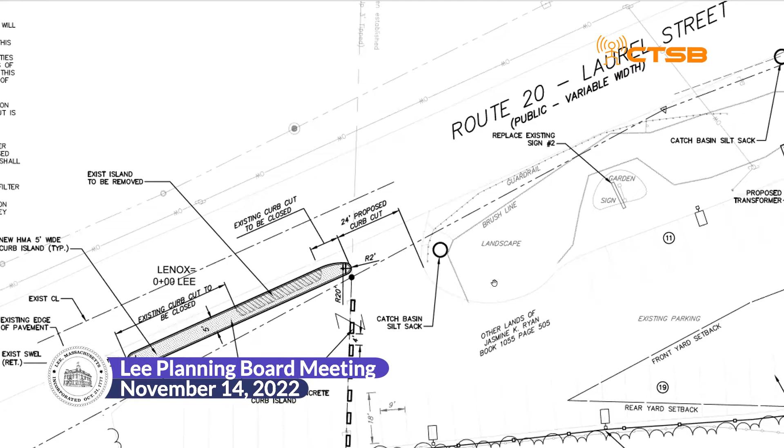Thanks, Pete, and feel free to jump in at any point if there's anything you want to hit on as well. For introduction, my name's Dan Delany. I'm a vice president with Fuss & O'Neill and a licensed professional engineer in the Commonwealth. I currently manage our Springfield regional office.

For this project, we're here before you to talk about one change to the site plan, which involves the change to the driveway orientation from what you saw during the original approval process. This is a result of our filing with MassDOT for an access permit to allow access from the site onto Route 20. That work was undertaken last spring, and we submitted the permit to District 1. They reviewed it, there was a couple of comments along with some questions on our traffic study, and we responded with a revised plan, and they issued their final approval based on the plan you see before you.

Let me pull up the date. I apologize, I was scrambling to get all this on my screen in case Pete couldn't get his up there, so I've got about 100 things open. Dan, I think this is the permit here. Yes, that's the permit there.

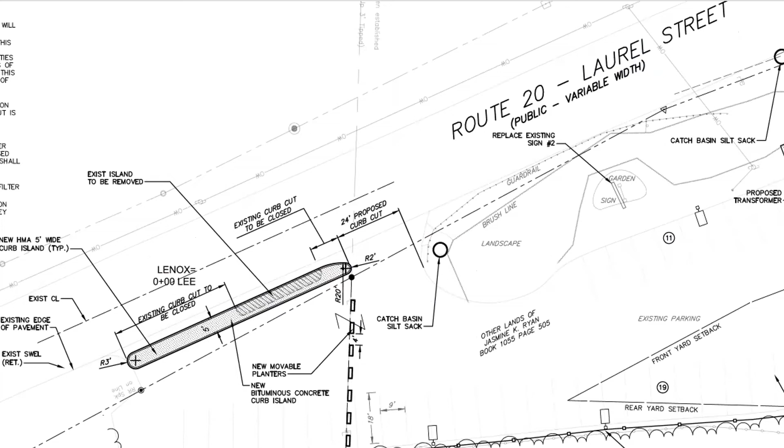So there you can see that was the final approved permit, which we worked out with DOT. If you go back to the site plan, Pete, the existing condition of the site along Route 20 currently has two kind of wide open openings, or curb cuts, if you will. They're barely curb cuts because they're so wide—the one on the left, or north, I believe is 39 feet, and the one on the right is 36 feet of open space. This is an existing condition that predated any previous MassDOT permitting.

It's not something they would allow in any way, shape, or form in a new permit. So when we went to them for an access permit for the site to access Route 20, we proposed a couple of variations of closing this off, resulting in one entrance, because we know from our experience, many years working with MassDOT, this is a major safety concern for them to have these wide open entrances onto a state route, especially ones in close proximity. Right now, the island itself is only approximately 30 feet wide, just round numbers—so you have a 39-foot opening, about a 30-foot island, and then another 36-foot opening.

This introduces, from one parking lot, multiple potential conflict points that really only serve to lessen safety. You have very dangerous movements here when you have the potential for somebody to make a right turn out of the north driveway and a left turn out of the south driveway, completely unchecked, in an area that's 1.5 to 2 times as wide as a normal driveway.

So this is something that Mass DOT routinely has us clean up anytime we go in for an access permit for any type of development.

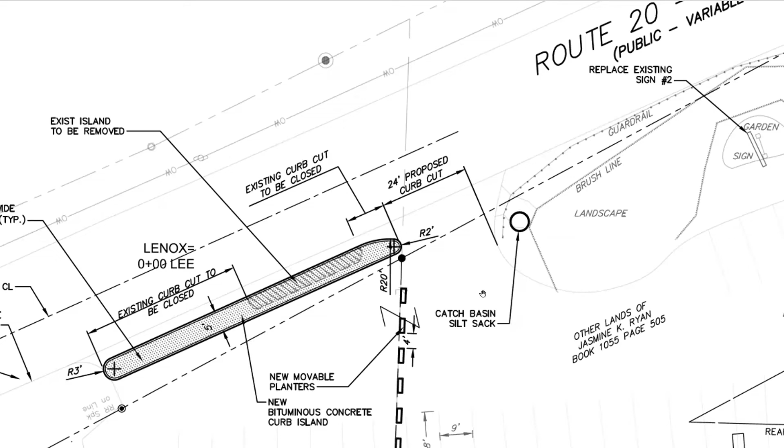I believe I mentioned in the select board meeting that what's also removed here are some of the most dangerous and potentially conflicting parking spots. In order to back out of any of those lower parking spots, you're essentially backing into a 39-foot wide entrance off a road with an average median speed of about 45 miles an hour. So those spaces were kind of the least safe on the site anyway, and removing that conflict definitely results in a much safer condition.

I don't know, Pete, if there's anything else you want me to go over, I'm happy to do that. But what we're looking at here is what's been changed since the last time we were before the board.

Dan, just one thing before we turn it back to the board. You had said the existing spots to the north, I think it's these spots are to the south actually, the remaining spots, right? Correct. Yeah, the remaining spots are to the south. Yes. What was removed was the 6 to the north. Sorry, yeah, okay, I just wanted to make sure that was clarified.

So, Mr. Chairman, that's the overview, and I'm happy to take any questions from the board.

Okay, I'll start with the first one. You had an accepted site plan, you were ready to go, you had a special permit done by us. Why this now? Not just because you wanted to make traffic flow in and out better, come on, to cut Lenox out of it?

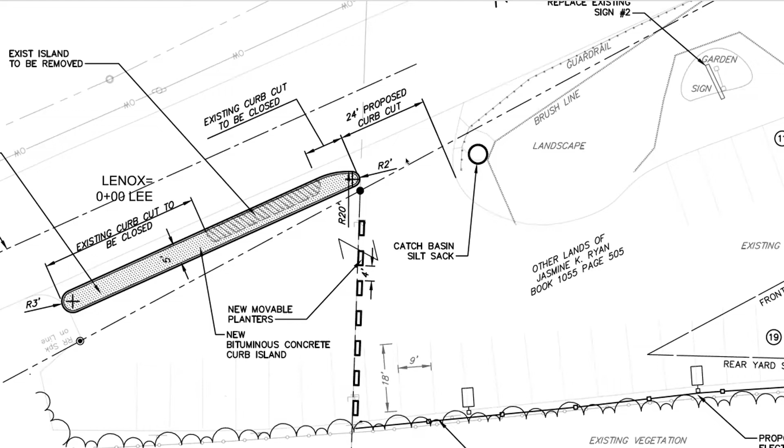One technical question. Your letter of October 13th from Stephen Savaria references a plan, but it looks like the date is October 14th. Is October 14th the date of the plan you're showing us on the screen? I believe it is. Can you check, Pete, to make sure? Let me zoom out here one second. I think there's a rev date up, should be right there - 10/14. Yes, can you see that date there?

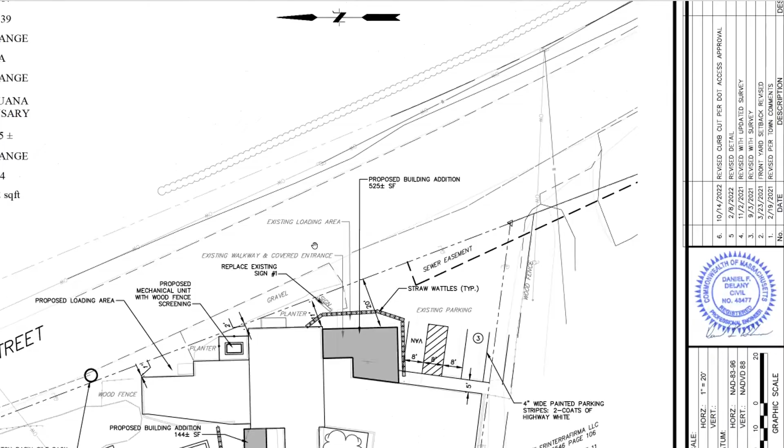All right, good. My second question is substantive. I'm a little surprised, and I realize what I'm about to ask is totally at variance with what you report as the consensus among the engineering community, but it's not obvious to me that a 24-foot curb cut on a 45-mile-an-hour highway is a safe way to get in and out of a lot. It seems like somebody coming southbound toward Lee from Lenox at 45 miles an hour wanting to make a right turn could run headlong into somebody exiting that lot, even if everybody's trying to keep in their lane, if the guy coming southbound swings a little wide. Is that an unreasonable concern on my part?

Just so I understand, the concern is that somebody's coming southbound on Route 20 wanting to enter the site, while somebody else is going out at the same time, and that's 24 feet? I guess 12 foot is a normal driveway - is that right, Dan? That's correct. Yeah, 24 feet is a normal roadway width, and either 11 feet or 12 feet is a normal lane width, depending on the type of road.

So even though the highway speed is 45, you don't think anything a little bit wider than this would be safer? I don't believe there's any safety improvement by making it wider.

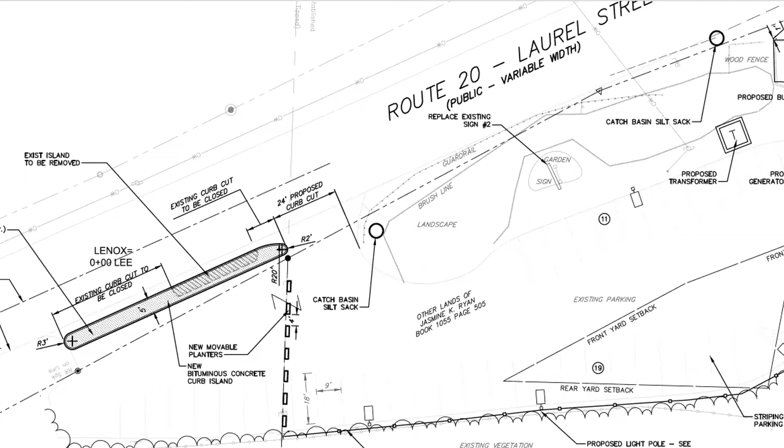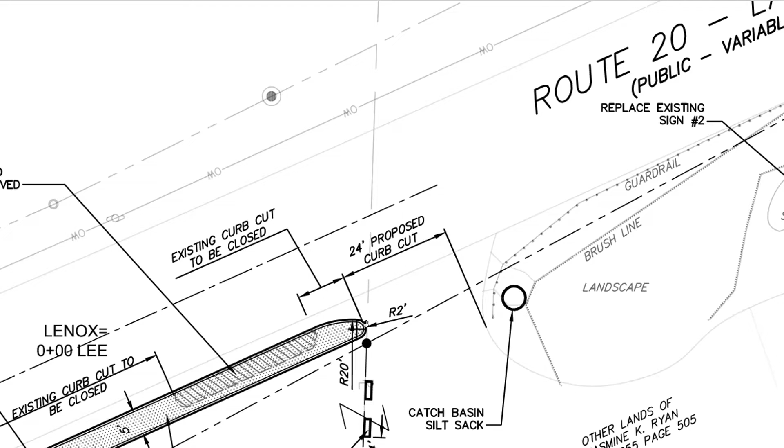But one other thing you mentioned previously that may be important for the board to consider - the 24 feet is here, but for people turning right, this is the actual curb line, isn't it, Dan? That's correct. The 24 is wider here for people to pull to the right and join traffic. It's hard to see, but that's the curb line as it will be when done. The 24 feet is measured at the narrowest point - that's the most constrained point. But it flares, this curb flares just like any other entrance, and looking at it in that one direction it flares about an extra 8 or 9 feet right there. All right, thank you.

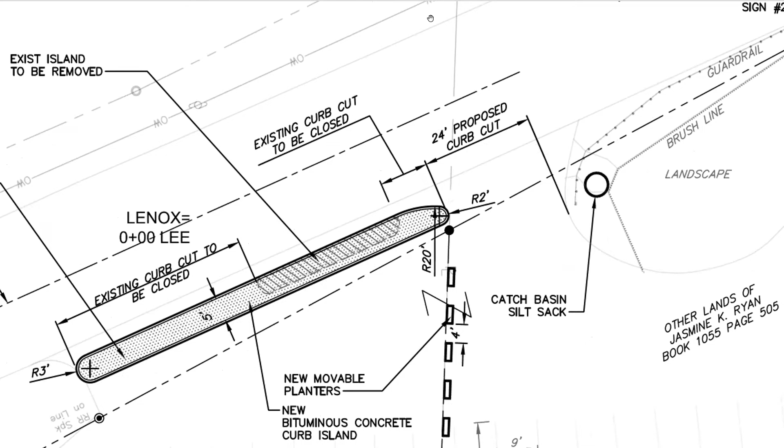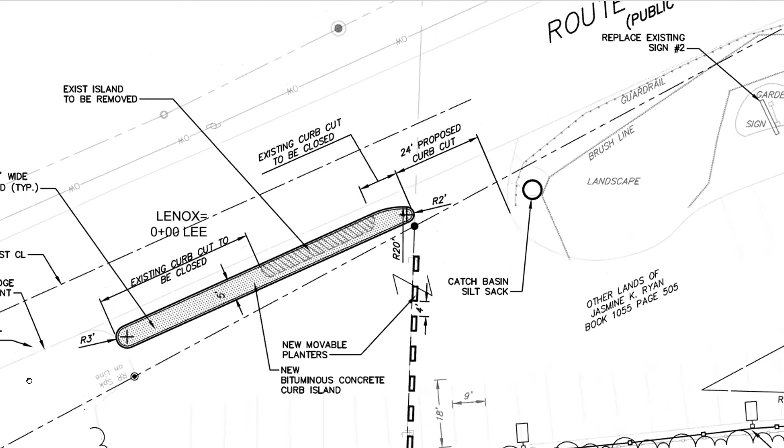Dave? Yeah, a couple of questions. Would DOT allow a sign to slow the traffic down, saying exit speed reduced, someplace north of the driveway? Because where it joins the angle of the main road, it's okay if you're heading towards downtown Lee, but when coming from Lenox down, it looks like a pretty sharp turn to get into the parking lot.

And where the bull nose is, this is just something I want to throw out. What if you put like a Cape Cod berm on that? So in a panic situation, somebody could drive over it by being airborne.

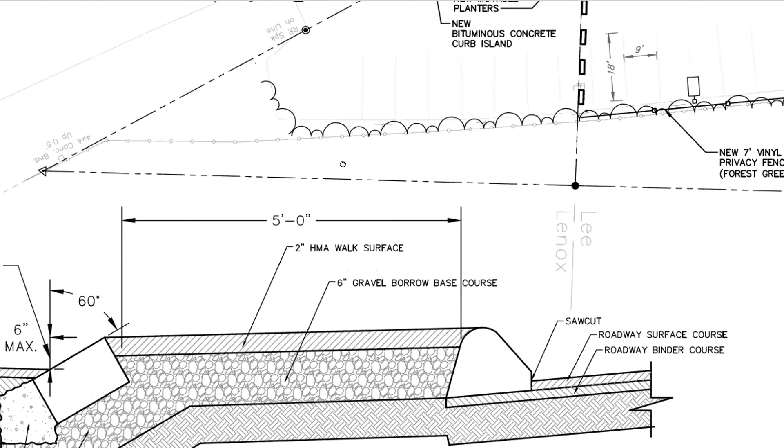Actually, it's a good point, and it's actually part of the standard detail. It's a slanted slope granite with only a 4-inch reveal at 60 degrees, so it's made to be mountable in the event that you accidentally clip it, or cut it too close. It won't help if you hit it going 45 miles an hour, but it's definitely a mountable situation where if you did cut it too close, you wouldn't throw your suspension out.

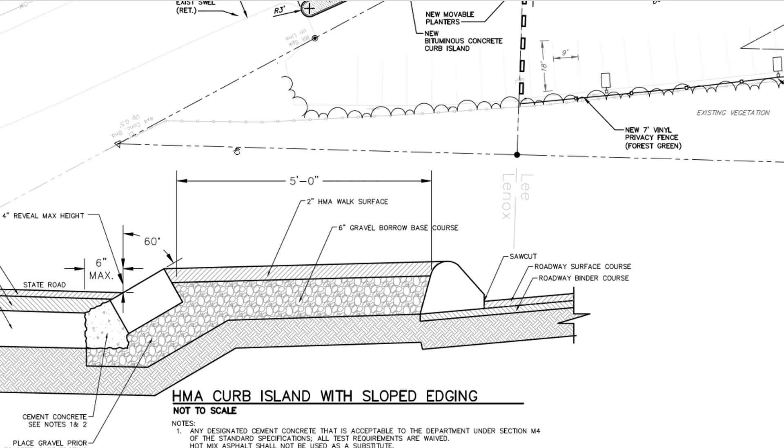Lastly, for me, are you going to clearly delineate the exits? Even with maybe a thermoplastic reflective, so at night it's visible where the turning lanes are, on the north and south side.

Yeah, that's a good point. This plan was laid out for DOT within their right of way, because that's their biggest concern. But yeah, that's something we could and will add.

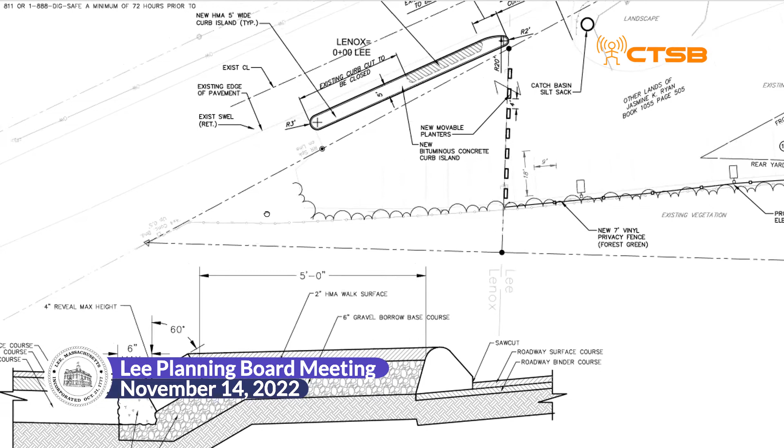And Dan, just for clarity, I'm not sure if you can see my screen. I pulled up that detail that's also included. Yeah, I was looking at it on my screen. I just want to make sure I was showing the board the right thing you were just talking about, the mountable curb.

Okay, well it still looks like to me with that curve, if you hit it at any speed, you're gonna go airborne. The Cape Cod is a lot more of a transition, and maybe they can do that with granite. But I'd be really concerned about keeping that, especially on the ends where the two lanes come together, the north side and south side exit, north side entrance.

I mean, yes, you can see it, it'll be an island. But if you have somebody coming southbound who at the last minute sees they missed the exit or entrance for the driveway and they pull in there anyhow, you want to keep them on the ground.

I don't think we have much flexibility with the detail because it's a standard DOT detail for use within their right of way. It's their mountable slope granite edging for a situation like this, like what you would use on the side of a roundabout. That's a typical detail, so you're right, I wouldn't want to hit it at a 90-degree angle, head on. It's mostly made so if you cut the corner and roll up around it, it shouldn't damage your car, because it's a 4-inch, not a 6-inch reveal.

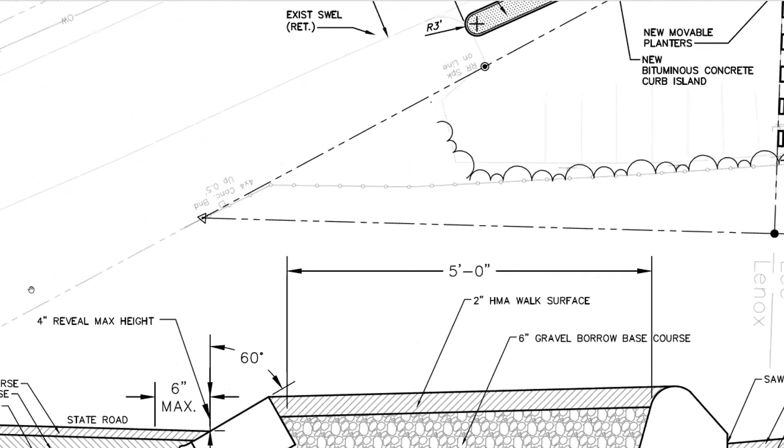As I say, you mentioned roundabouts, we've got plenty of them and they've been popping up left and right. So yeah, if it's like that, then I guess that kind of removes that part of my question.

All set, Dave? Yep, all set. Peg? Yeah.

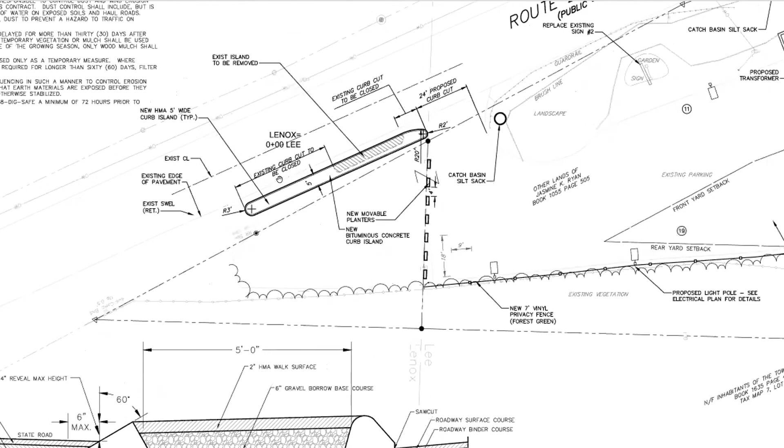I was concerned about the traffic, as you read the original notes, or the minutes of the meeting. DOT is saying that this is a safer way to do this, even though some of us still have some concerns. Is there anything in writing here? I'm sorry, I didn't read everything, but if there is, I'll read it. Just in writing that makes it their approved plan from their DOT.

Approved plan. Okay, could you just talk to me a little bit about the new movable planters and why they're there? Hey Peg, this is Pete D'Agostino.

So these planters are there to delineate the property line between the town of Lee and the town of Lenox. As we mentioned during the select board meeting last week, the reason we went with something movable is so that we could approach the town of Lenox about using this for snow storage or some other purpose. So we put movable planters, not removable but movable, so that we could potentially use this for additional snow storage or something to that effect. That's why we didn't put a permanent fixture in place, if you will. That was the thought behind that.

Thank you. If you ever do any more work on Route 20 or with the DOT, it might be wise to go to them first for the original plans.

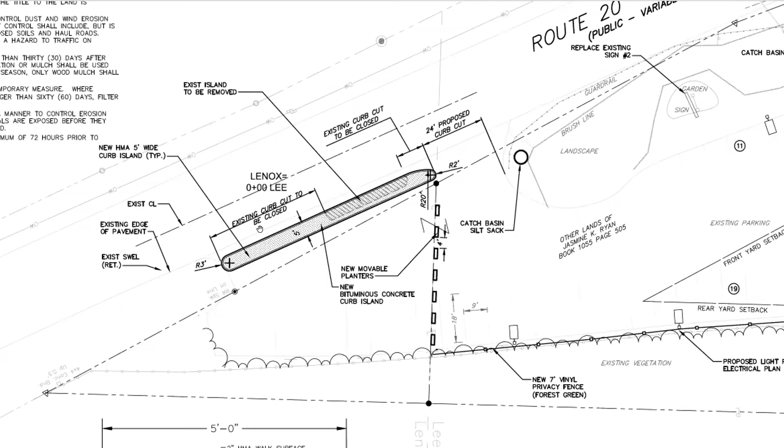Right, Matt has recused himself, but Conrad, you have a lot of comments. Bunch of them. Questions, a couple questions, a couple comments.

It does seem like the single point of access is far and away much better than the original two points of access, the much wider driveways that were 36 feet wide and 39 feet wide originally submitted by the applicant. So the single point of access is by far the better way to do it.

Agree that the MassDOT requirement for eliminating the northerly curb cut reduces the southerly curb cut down to a single point of access at a 24-foot throat. That is a MassDOT standard. Lots of times if you can get a 24-foot throat and widen out the radiuses of flares on either side, that's usually desirable too. We can talk about that in a second.

Since there's no parking on the north side of the Lenox piece, is there any way of removing the paving on that Lenox piece and installing loam and seed in its place? Just thinking that the edge of the paving and the grass would not need to be a curb, it could just be the edge of grass. It would certainly look a lot better visually as you approach the location. It also removes a bunch of impervious material and in its place puts pervious material that would absorb more stormwater flow on the north side of the property.

Although that would be minimal at best, it would still look far better if, instead of putting planters there with all this paving on that side that you can't use anyway, you just remove the paving and put in loam and seed. It would look a lot better when you come into the site. Just an observation.

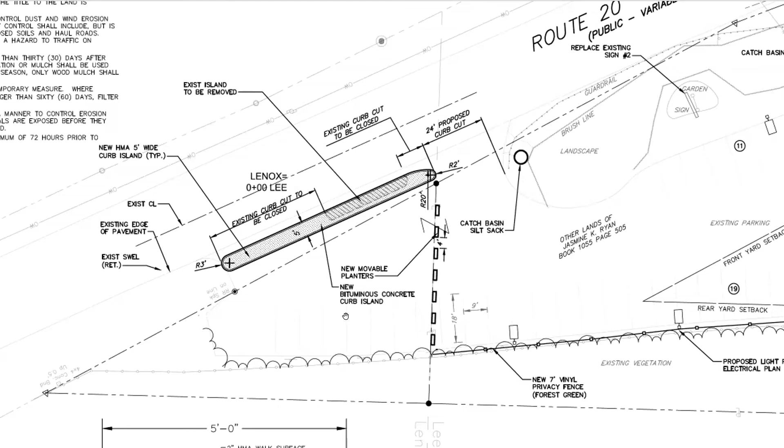It is a MassDOT standard, but if you can put a wider flare—I know you've got the wider flare on the south side—can you put a 20 or 30 foot radius on the north side where the bullnose is? If you put a 20 or 30 foot radius that wraps around from the front of the curb and runs tangential to where your town Lenox line is, that would give you more of a flare. You'll still have your 24-foot throat, but it'll give you a little bit wider flare to get in if you had like a tractor trailer or a large box van. Again, just an observation.

In the original approved plan, the parking that was proposed on the northerly curb cut was way too close to the right-of-way line anyway, and it was definitely a backup hazard at the point of entry.

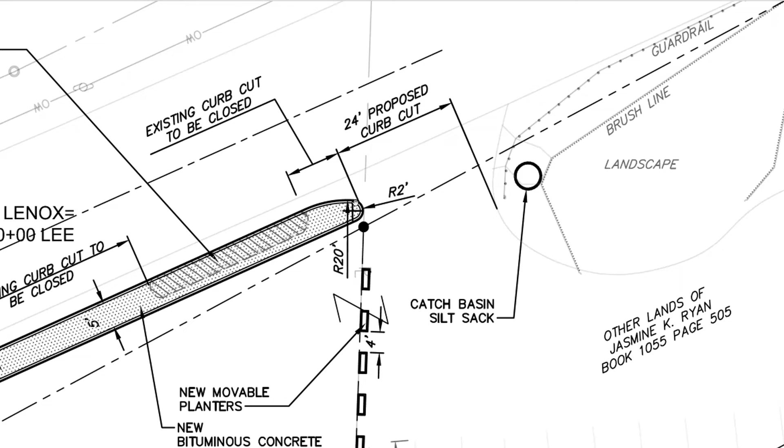I was kind of confused why the applicant didn't eliminate the two driveways and go with a single point of access initially, because that seems like it would have been the safer thing, and it really should have been done at the same time. I'm also curious why MassDOT wasn't consulted on the driveway configuration in advance

of the original planning board site plan approval and the select board special permit back in March of 2021. It seems like a lot of this could have been avoided if you went to District 1 and talked to them about the driveway configuration initially. They would have said right then and there that they're not going to allow the two driveways, and they'd tell you about the 24-foot driveway requirement. Going to District 1 initially just to get that concept discussed would help out considerably.

That's pretty much it. I think approval on the 24-foot is an absolute. If there's something you could do on that northerly bullnose, pick it out and put a 20 or 30-foot radius that runs tangential with the front curb as well as the Lenox town line, I think that would help, and still meet the criteria of the DOT 24-foot cut. Is that an option? Is that a thought?

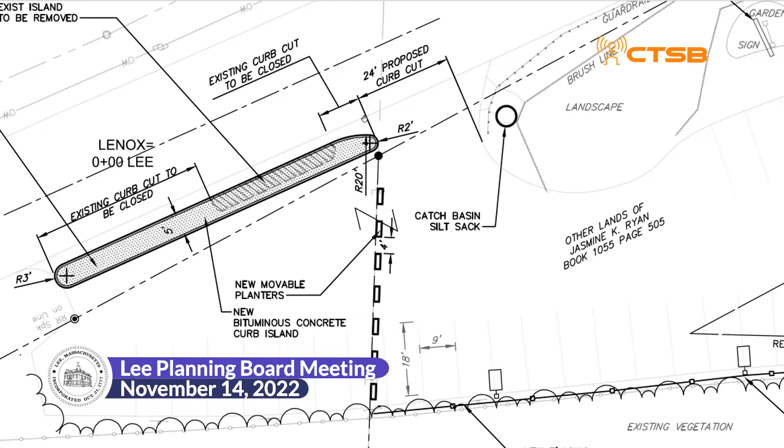To the member's question, Dan, if you could address the radius on the north side. But we do not anticipate any tractor trailers. The delivery vehicles for this use are primarily a Sprinter van or smaller.

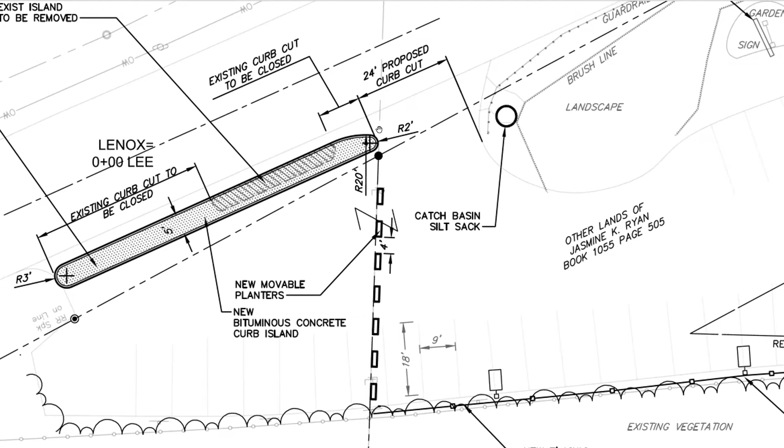Many of the businesses that will be delivering, quite frankly, are using those kinds of vehicles, much smaller in nature. I can't contemplate a tractor trailer truck entering this back. I guess in the world of anything's possible, but from general practice for the industry, deliveries aren't made with tractor trailers. Dan, if you want to speak to the radius on the north side of that bullnose, because that's not my lane.

Yeah, it's a good question, how do you treat that in the safest way possible. It's a good observation. I know we had put a 2-foot radius basically starting from, in this view, the bottom, curl that around, and then continued to 2, and that radius sort of matches into the full width of the island.

That's a wider radius. When we were talking to DOT, what they didn't want us to do is take the radius and dive it to a point, like a knife point. They wanted us to continue that 2-foot around just enough so it's continuously rounded, and then dive it. So that's why we ended up with that different shape there.

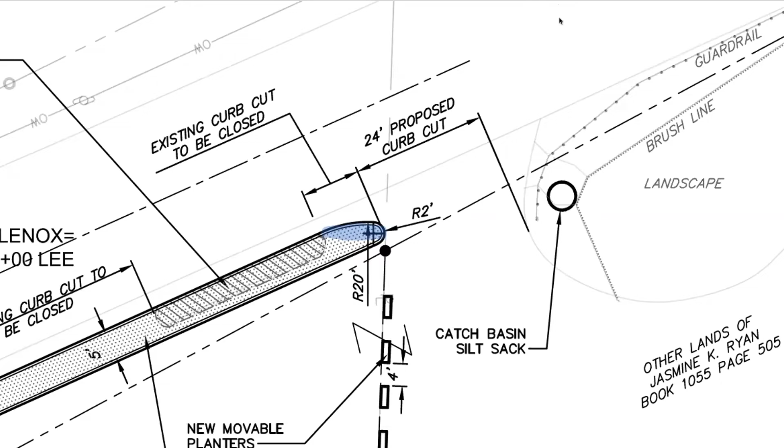That's why I was thinking, if you took that R20 your cursor is on right there, and again wrapped the front curb around to where the first planter is, that planter box you're showing, run a 20-foot radius around it. You'd still have the 24-foot throat, but you'd get the wider radius to get the cars in and out better. They have to stay out of Lenox.

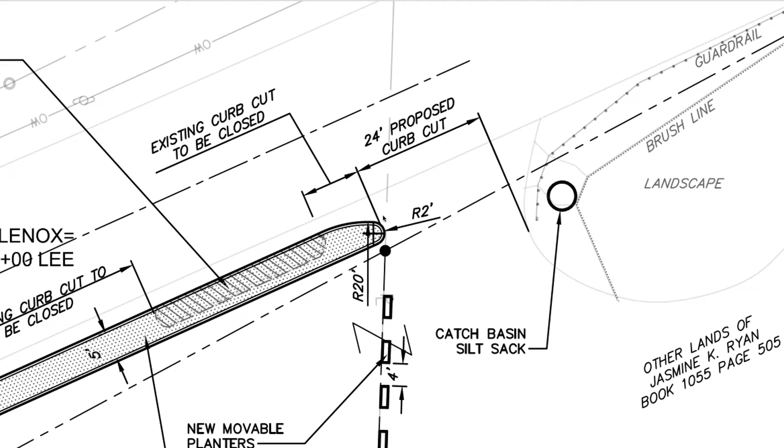That's the crux of it. Right of way, up to that line, up to that line, yeah. We're asking them to bring it further onto the lot than the state right of way extends. We're talking about that much,

So 6 inches, you're asking them to bring it west 6 inches. I guess what I'm asking is, is there any radius that could be accomplished that again would run tangential with the front curb and wrap around to the Lenox town line, to give a little bit better of an approach for the southbound traffic making that right turn entry? I guess that's what I'm asking.

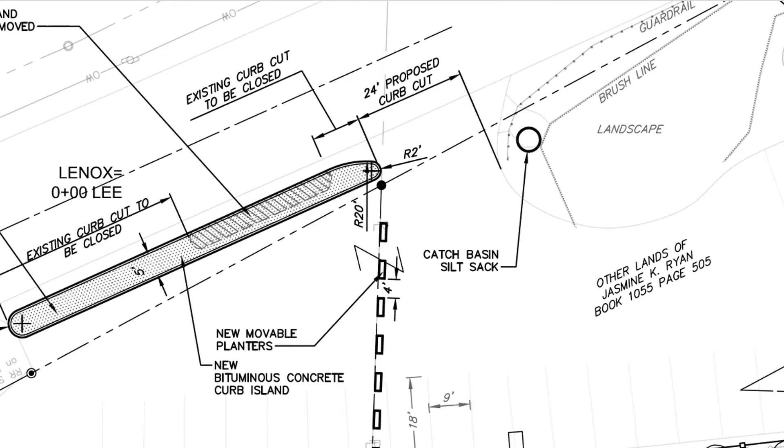And if it's in the state right of way, that's where you have control of it. Maybe you don't have control of it in Lenox, but you'd have control of it with the state, as long as the 24-foot throat is preserved. I've seen applications where you usually have the 30-foot radius on both sides of the 24 feet if you have enough right-of-way space to work with. Just like you're retaining what's going on the south side, right where the guardrail radius is, you see where your guardrails are. That's a wide radius right there.

Again, 24-foot is preserved. You're just putting a wider radius in there for a better approach in and a right turn out. So Conrad, I think I understand the problem is they've got a minimum, they can't bring it to a point. They have a minimum 2-foot radius on any part of it. Yeah, so it's a 5-foot wide island. A 2-foot radius is a 4-foot diameter. They've only got 1 foot to play with, right?

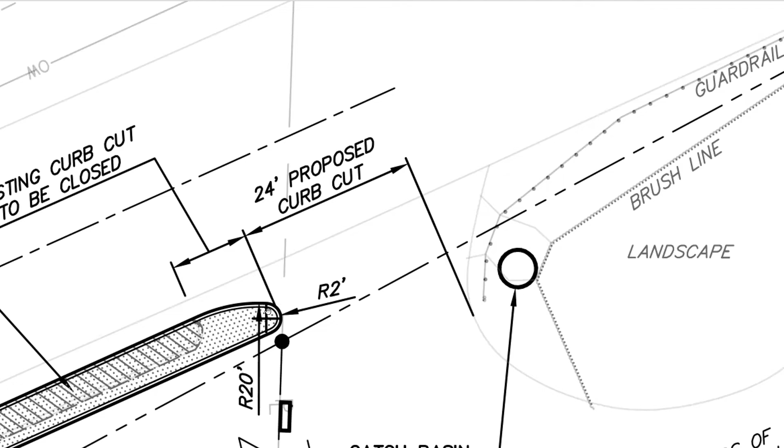I mean, I'm sure you need the island there. If you go with the idea of putting the grass, removing the paving and putting the loam in there, then you don't even need that back curb.

I mean, what's presented to us is what will our recommendation to the select board be, to accept this amendment or not.

About getting rid of that, the big paving in that Lenox area. Do we have any control of that? We don't have any control of it. Does the owner, he can take that out of there, or the select board could, after this, could put it on a condition. Just clean that whole area up, it would look great.

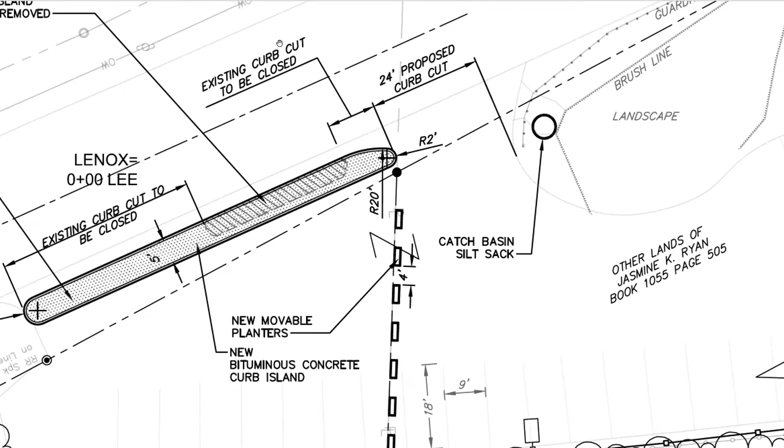It'd look much better. Mr. Chairman, if I could just speak to the Lenox land, I'm not sure if Lee can condition the land in Lenox or not, but that's in part why we put these movable planters, as we discussed tonight and again with the select board last week. Once we're through the Lee approvals and moving forward, we intend to discuss with Lenox the potential use of this. Could be snow storage, maybe it becomes grass. I think we've said, last week's meeting and this meeting, it really is the reason for these movable planters, to facilitate that discussion with Lenox in the future.

So to the extent that means something to the board, that was why we didn't want to put some permanent structure and then just leave this abandoned. We'd want to see what path, working with the town of Lenox, we could accomplish over here. We're cognizant of that, and certainly you've heard the comments from the board tonight relative to that, and really for us, that's the next discussion with Lenox, outside of these approvals. I mean, even if we did snow storage, it still wouldn't have to be concrete necessarily. So we just got to figure that out with Lenox, I think.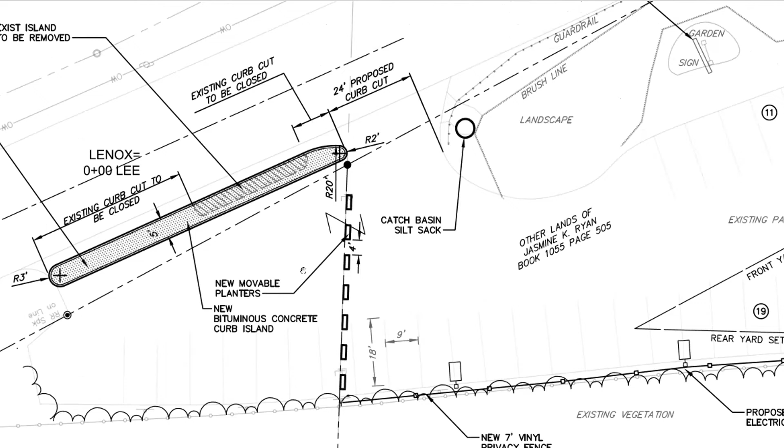Which is Dan the traffic expert? Yes, Dan's here. Question for you: so you're telling me a single in, single out, 24-foot is the safest arrangement entering a parking lot? Is that what I'm hearing? Well, for this parking lot, for this level of traffic, obviously if you had a much higher traffic volume, a huge traffic generator, you would have other considerations. But for this site and this condition, yes.

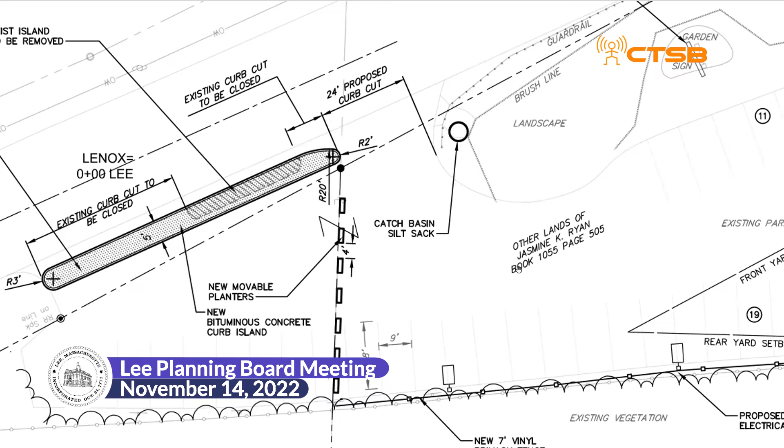What outlets, the premium? I don't know. Their traffic generation, you're talking thousands of cars. It's a totally different situation, not even in the same realm as the traffic generation of the other, similar store in town. It's quite a bit different.

Even if they marked it with arrows, which side is the right lane, which side is the left, just to keep people in their lanes. I'm sure that'll be there. I think that would help immensely. You're talking about somebody in a southbound lane who takes a northbound turn. If they look down and see a giant arrow pointing them to the right, they'll know they're in the wrong lane.

There isn't going to be an option, it's going to be one lane. Yes, but it's one width, though it's 24 feet, which makes it two lanes. So if you took it down... one in, one out, Dave.

Okay, I'll entertain a motion. Does anyone want to hear from anybody in the room or online with a comment on this? Mr. Chairman, only because I'm serving the host, I don't see anybody asking to join the room and I don't see any hands raised, and I'm looking at the participant list to determine that. Okay, thank you.

Peter? I'm in favor of the board supporting this change. It seems much safer than the two entrance-exits we had previously. I do still have some reservations about two things in the plan. One is that a southbound driver entering the parking lot—I think Dan said we want them to slow down, and I too want them to slow down, but I'm not sure they will. As a driver with no engineering expertise, it feels a little dangerous to have a 45-mile-an-hour right turn exit that's only 12 feet wide.

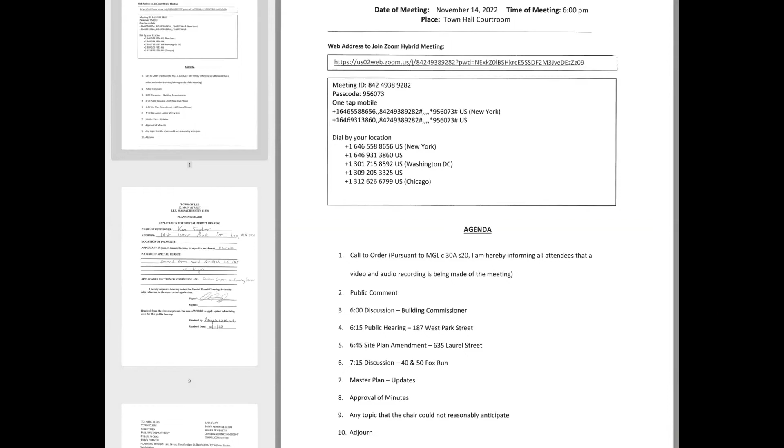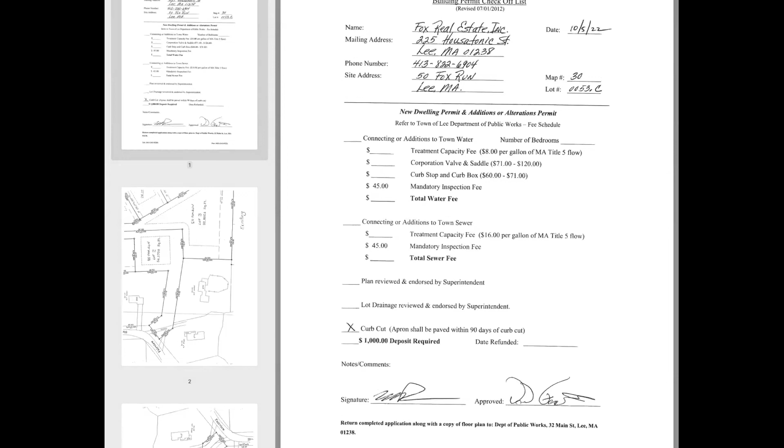Fairview Street, over here, this is existing. Did you look at the back of it? Lot on Lenfest, the house that has no frontage. The driveway is 40 and 50. So he's gonna take these two lots and run them down to Fox Run to pick up the frontage there. Okay, that's why I was confused. Yeah, it's continuous, this is Fox Run. The frontage is down here, and then these are the two curb cuts for Lenfest and Briggs. The lots would connect to them and not even create, there's two lots here, and it ties down to get 60 feet. And then you have the other one, so it'll be 100 and 125, but the main curb cut would be... okay, I should let Mark talk.

Okay Mark, sorry, you want to present to us here what we're thinking? So the idea is, if you look here, I'll do it on my piece. This is the frontage down here on Fox Run for lots 2 and 3 Fox Run, which are 40 and 50 Fox Run, the actual addresses. The idea is to do a common driveway off of Fairview Street to these two lots. In essence, this driveway would be a shared driveway and would be significantly flatter than coming up this way. The curb cuts, the way I've laid this out, there are no further curb cuts on Fairview Street at all. They're both existing currently, so where I have this kind of wide is just connecting to existing curb cuts. So we wouldn't even go into Fairview Street at all, we would just attach to those two and put our driveway here. And the shared driveway, this would be for 40 and this would be for 50.

Where's the frontage coming from for each? Because you're required 125 feet. They're actually shown as 100. The legal frontage is down here, and when you're on a curve, you can get a percentage reduction. I believe they're 110 on the curve. So two frontages are legal frontages down here.

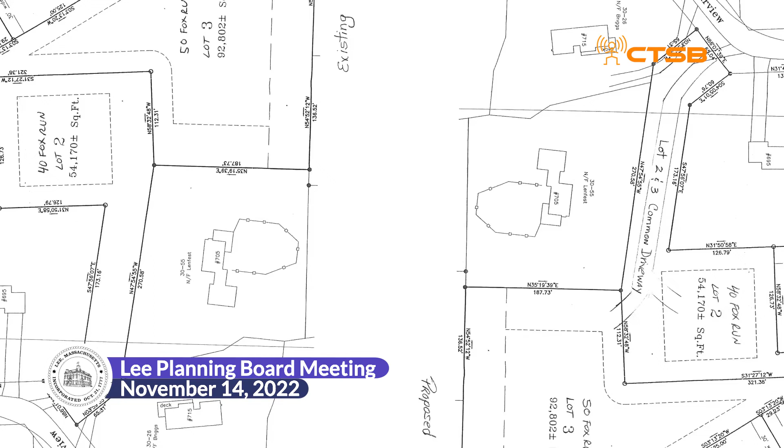I think I have a guy here, Gordon, you want to chime in? Sure, thank you. Number one, whether a lot in a subdivision is buildable or not isn't up to the planning board, that's a building department decision after they review frontage. And as Inspector Comer just mentioned, he'll be the determinator of whether or not it's a building lot, not the planning board.

Generally, the only thing that's noted on a subdivision plan, if it's not a buildable lot, is that it's set aside for some kind of drainage issue or whatever, that's usually acknowledged. But as far as whether or not it's a building lot, I think you're going to have to wait and leave that up to the building official that enforces the zoning bylaw and has time to review frontage issues.

If there is legitimate frontage on a road, I know the court cases that have come about say that with planning board approval, you can access a lot that's a legitimate lot with legitimate frontage, not illusory frontage. They can access that lot from another space, but it has to be with approval. But first of all, it has to be a real lot with non-illusory frontage. And that's a determination of the building official, believe it or not, not necessarily the planning board.

You just look at whether it's a lot or not. Well, that's all, I'll be quiet now. Thank you.

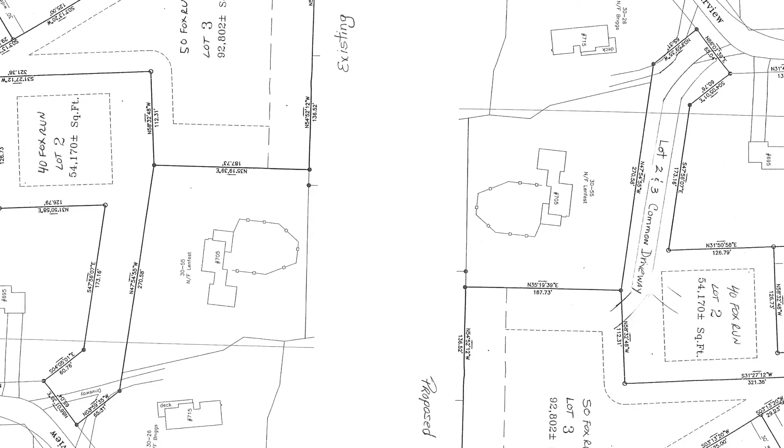Yeah, we approve it, right? Just thinking that we don't do the shared drives much, but you're gonna, legally I think we have to. There's gotta be a deed. Is this lot sold yet? Yes.

There's been something where we have to know that there's an agreement to that second lot, because it goes over this property. I will check the deed and give it to you because the deed is done. Did you see that deed by chance? I did not. I did not either. It's just the one that comes to mind, the Attorney wrote the deed.

Linda Shafroff's house, remember they built on Meadow? And her partner, she was in the second house. Then they started selling off. Well, her house went over, it was a common drive, and there had to be an agreement.

In this situation, similar: 50 Fox Run will have an easement, their deed will have an easement to travel across 40 Fox. Right, and you're absolutely right, I think it's in the deed. I didn't read it, but I'm guessing it is. The lawyers and I talked about it, so I'm pretty certain that if they have that in there, because it has to be there, because I can't allow them to travel across property that's not theirs.

So I think we'd like to make sure that's documented. I can show you that, it keeps future problems out. No problem. What's the addresses on these two sites, even though the access is from? 40 Fox Run and 50 Fox Run, that's the address for each, but access will be from Fairview.

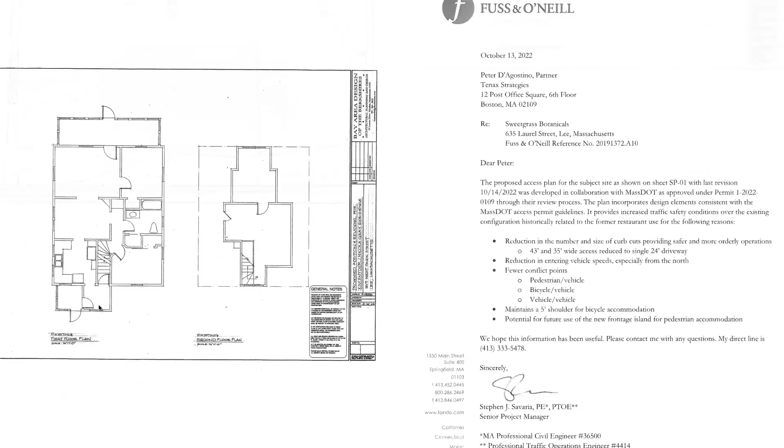I went up there today and I thought 40 and 50 are on the same side, confusing. And I always wondered, to be honest with you Mark, about the very first house there, why, but now I know why that land is the way it is. I thought, why is that all open like that? Exactly. Eventually things do make sense, but not always.

But thanks. Okay, thank you, Mark. So we'll be on the docket for 2 weeks. Yes sir, I'll get my stuff from that, and he'll get his determination to us. Okay, thank you for your time. Great, okay.

Okay, moving on, we have master plan updates. So we have a meeting coming up next Monday, and the chief topic is going to be housing. We've received a document that describes the Berkshire Housing Authority's opinion about the need for housing in Berkshire County generally. We're going to have the executive director of the Berkshire Housing Authority talk to us, and her public relations extension person, community engagement, I'm not sure what the exact title is. Two of them are going to be talking to us for a little while.

We've received a document from the Lee Housing Authority describing their activities. I don't think I'm going to invite them in because there's really not that much to learn beyond what she's already written. So the first part of next week's meeting is going to be about housing, and we're going to try to come up with some questions or opinions about what part of the master plan should be about housing and what our views are, if we have any yet, about housing needs in the town.

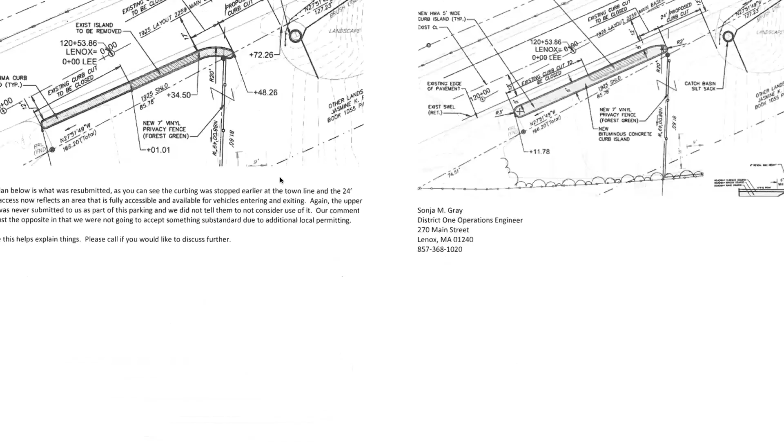Yes, I'll just take a minute. We had our first meeting, thanks to Chris Britton organizing us, and we have a good committee. Tom Logston's going to chair it. Members include Tom Unsworth, Tony Thomas, Kathy Hall, Steve Belafonte, David Stone, Tom Logston, myself, and Susan Stone. I want to say there are 4 accounts this Community Preservation Committee will be concerned with, and we're trying to get an application that'll come later.

The accounts are open space and recreation, housing, historical buildings or monuments, and a separate account. Each year at town meeting, money will need to be put into each of those 4 accounts, not just a total amount. Right now the town of Lee has $138,539, and they're expecting $42,000 more from the state, making it close to $180,000 collected from that tax. The money can be rolled over from year to year — they don't spend it all.